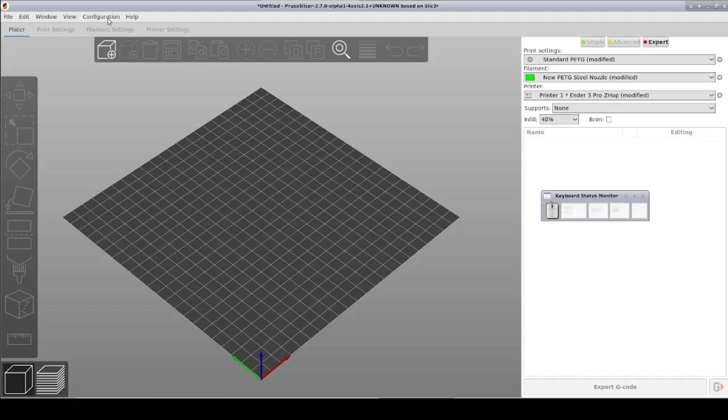First, some setup. In Configuration, Preferences, General, check No Gravity, Parts Can Float. Select Expert Mode. In Print Settings, Output Options, Advanced Output, a new section, check Errors are Warnings. Also check Complete Individual Objects at the top of that page under Sequential Printing. In Filament Settings, Filament Overrides, check Lift Z and set it to 4 mm.

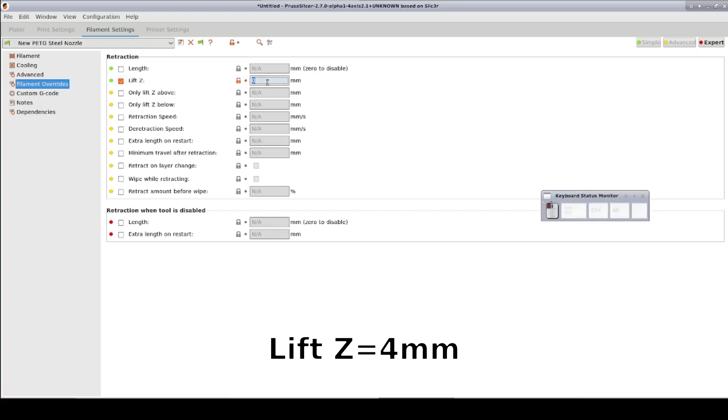In Printer Settings, Custom G-code, in Between Objects G-code, add M600. Optionally, you can add a comment to help you find it if you need to manually edit. This will cause it to do a manual color change routine between pieces. It's all ready to go now.

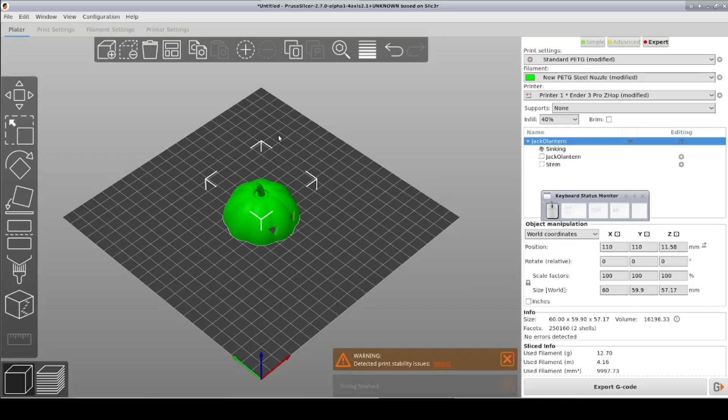So I import the jack-o'-lantern STEP file as before. As you can see, it's sinking into the bed. That's because the bottom of the jack-o'-lantern was below the XY plane in CAD. With gravity turned off, the slicer leaves it where it is rather than forcing it to be on the bed. I can fix it by clicking the Drop to Bed button in the Object Manipulation pane.

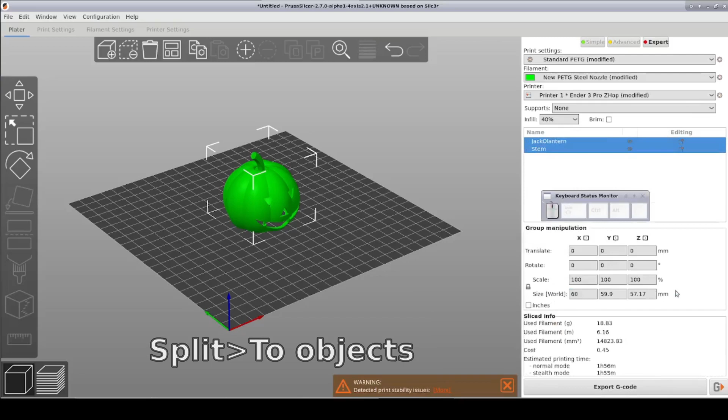You'll notice that I have removed the sacrificial square fused to the stem. Now I right-click Jack-o'-lantern, Split, To objects. In the official version, the stem would drop to the bed, but again the slicer leaves it where it is. Of course, turn on supports from the build plate.

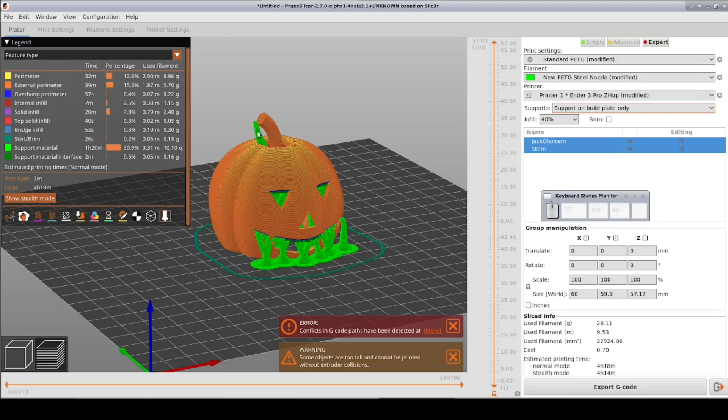You can see a support for the stem growing right through the jack-o'-lantern. That's an unfortunate side effect. The slicer assumes objects can't be stacked on top of other objects, but they can now. So right-click on the stem, add settings, support material, and check Generate Support Material. Now select support material under the stem and uncheck the box.

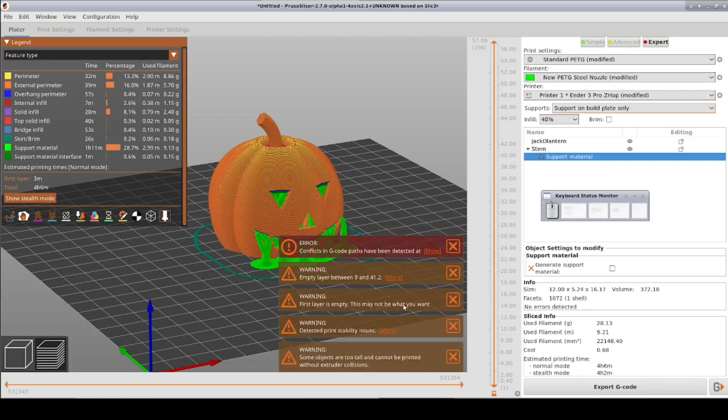You'll see a warning that first layer is empty. It's referring to the stem object, but now it's just a warning, so it will generate the G-code just fine.

I could turn off sequential printing and use the same procedure as I have used in past videos, where I turn on each single object in turn, generate G-code for that object, and either send them to the printer sequentially, changing the filament for each, or manually edit the G-code files together, removing the unneeded parts at the beginning and end that shut down, rehome, then heat up again. Sometimes that would be necessary in order to avoid a nasty collision.

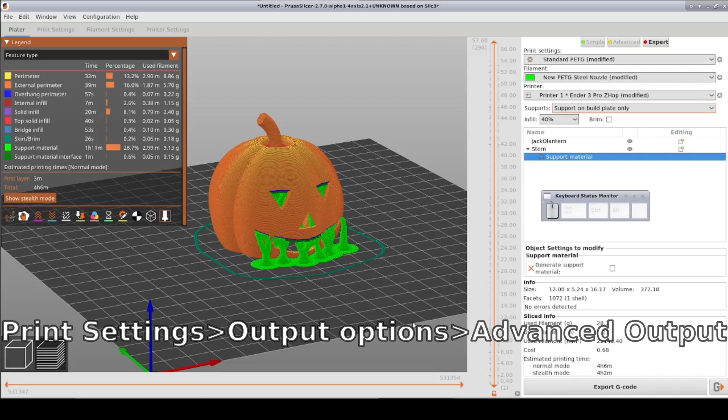If you need to splice G-code files together, you can use the Elide Start and/or the Elide End options in Advanced Output to get rid of the startup or shutdown G-codes respectively. But even better, since I added a color change between objects, the slicer will now do all of that for me. Note that the objects in the list must be ordered from bottom to top. If they're not, you can drag them into the correct order.

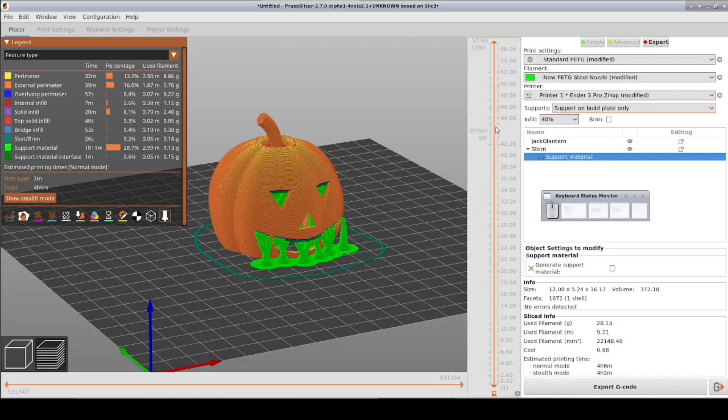You'll see all sorts of warnings about conflicts in G-code paths and objects too tall, etc. But as long as you step through the preview to make sure there's no crashes, you're good. Speaking of that, let's look at the transition between the jack-o'-lantern and the stem.

I'll scroll down to the first layer of the stem. Now I'll click on the bed in the preview image and use the left arrow to step back into printing the layer. You'll notice that I've replaced the arrow indicating the nozzle with an actual simplified MK8 nozzle. It loads that in as an STL file. I made a simplified nozzle end in FreeCAD and exported it as an STL.

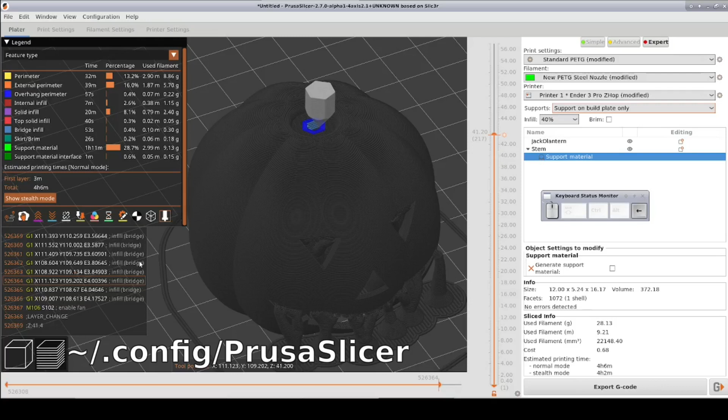If you want a custom nozzle, or better, the entire bottom of your hot end assembly, model it in CAD with the nozzle opening at the origin, then export it as Nozzle.stl, note the capital N, in the directory with your configuration files. In Linux, that's your home directory .config/PrusaSlicer, or PrusaSlicer-alpha for the alpha versions. In Mac, instead of .config, it's your home, Library, Application Support.

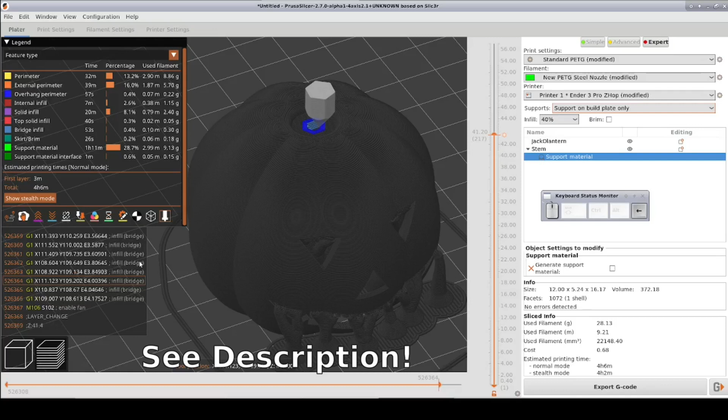In Windows, it's one of C:\Users\your username\AppData\Roaming\Slicer, or C:\Documents and Settings\username\Application Data\Slicer. Why, that's a lot of backslashes. Or at least that's what the comment in the code says. If you don't want to design your own, there are a number of useful STEP files of nozzles and entire hot ends available on GrabCAD.

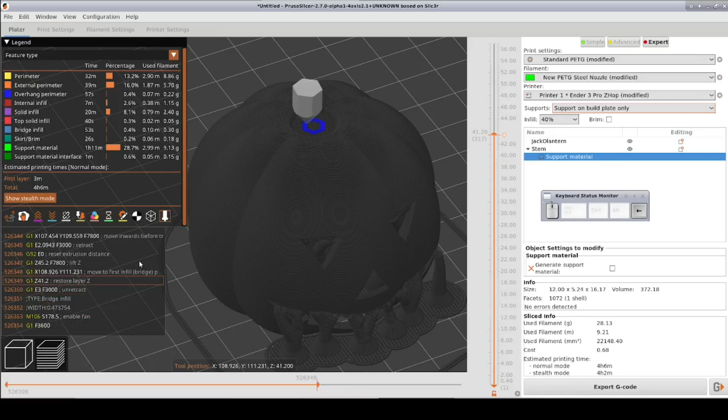Now I'll step back a bit and I can actually see that there are no nozzle collisions. One further mod, you can keep stepping with the left and right arrows and it will move to the previous or next layer and continue. You can roll up the legend to see the G-code it doesn't step through at the layer transition. I'm not sure why it skips over that part.

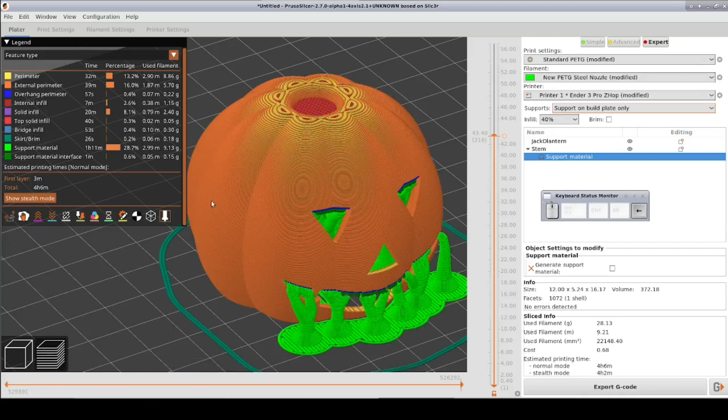I'm glad I did this when I was testing my changes. There was an awkward spot where it lifted the nozzle according to the lift Z setting, but then for some reason it plunged it back into the jack-o'-lantern, then moved to the first point of the next layer. I added one more patch so that when it does a Z lift, it never lowers the nozzle until it unlifts Z in preparation for printing. Now it lifts Z at the end of the jack-o'-lantern, moves X and Y to the first point in the stem, then lowers the nozzle into place.

Since I can't imagine any case where it is necessary or in any way better to lower the nozzle before a travel move, that change is not optional. I can only imagine that lowering then traveling was some kind of thinko. It happens. Note that since the patch to avoid plunging into the first print uses the lift Z behavior, you must set a lift Z value even if it appears unnecessary. As long as it's set, you avoid the crash.

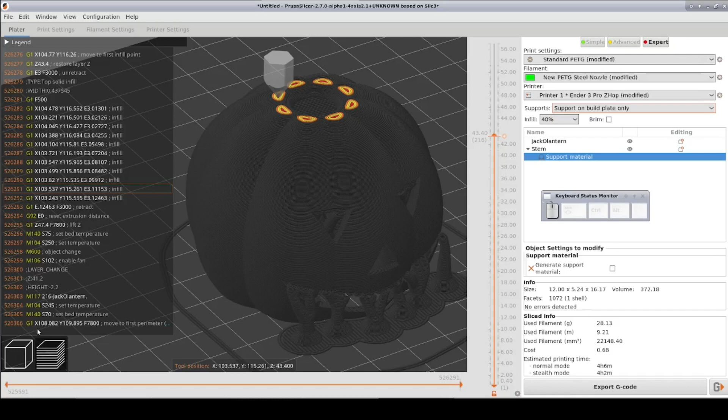You can see this in the print preview. The top of the jack-o'-lantern finishes, then it lifts Z to 47.4 millimeters, then it moves to the perimeter point of the stem's first layer, and as a result of a call to unlift, lowers the nozzle to 41.2 millimeters. You can see that it is going to do the right thing by stepping through the layers. The nozzle fits down into the depression at the top of the jack-o'-lantern with no problems.

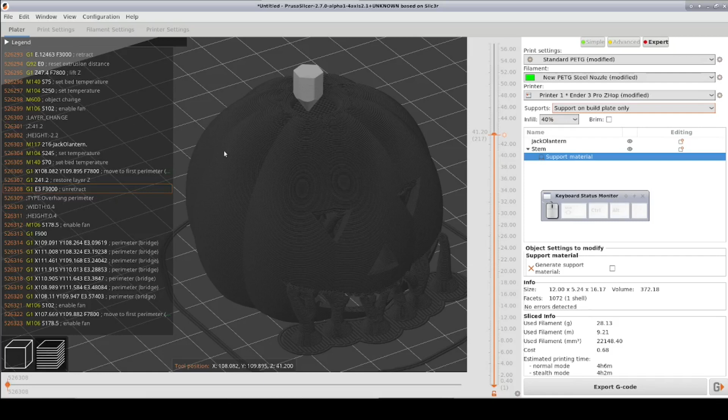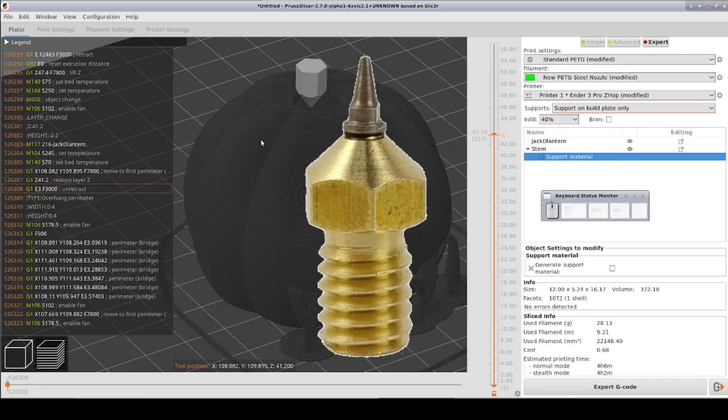I really do recommend using a custom STL of the bottom of your hot end. When I do this with a model of an E3D V6 nozzle, it looks like it gets dangerously close to a crash. Various auto bed leveling probes could be a problem as well. I saw that Stefan from CNC Kitchen used an adapter for the E3D V6 with an airbrush nozzle on it to get extra clearance for some non-planar printing. They seem to be readily available on Amazon, AliExpress, and other places and might be worth checking out. Since E3D nozzles will also fit an MK8, I may try one myself.

He also found that a Volcano nozzle with a couple of M6 nuts on it will work as well, giving some extra clearance. No idea how that might work with a PINDA probe. Machines that use a load cell or a strain gauge to probe the bed with the tip of the nozzle should work just fine. Don't let the ease of use in these new features fool you. It does no advanced collision detection. In this expert mode hack, you are entirely responsible for making sure the nozzle and hot end will not collide with any of the printed objects. The use of the actual nozzle shape as an indicator helps, but the final call will be visual.

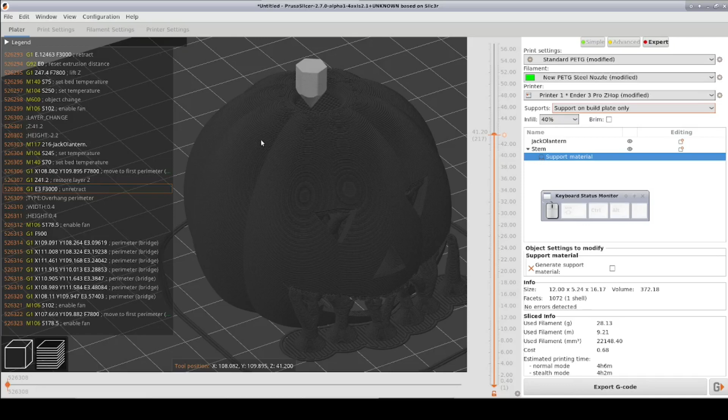Just a final note. These techniques are worth looking at even if you have some sort of MMU or tool changer that makes filament swaps easy and automatic. By reducing the number of swaps, you make the print go faster. Tool changes take time and filament changes can take even more. You also reduce the filament waste in the form of waste blocks and printer poop.

Given more work on the slicer, even more complex multicolor shapes can probably be managed with fewer color changes by printing multiple layers of one color and then backfilling with another. That will depend in part on having a hot end with good clearance around the nozzle. So in addition to being very helpful for those of us who are doing manual color changes, this is also a good way to learn how much we can get away with when backfilling and how we can make the hardware better at it.